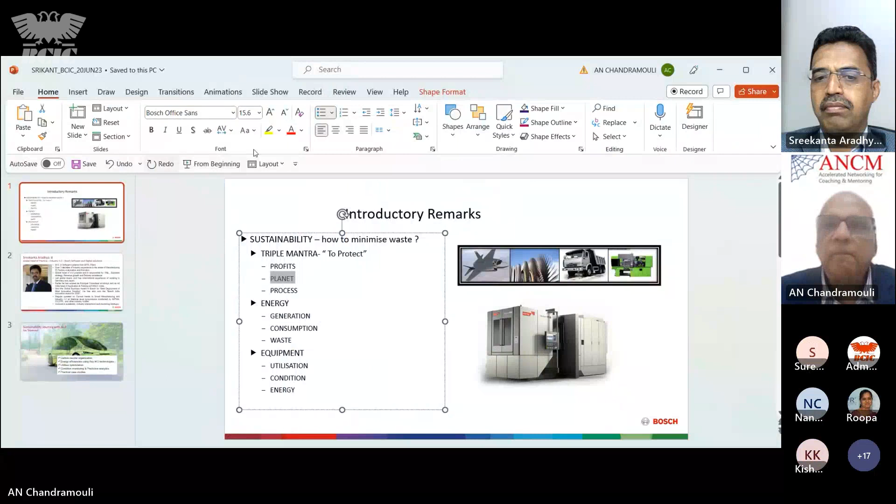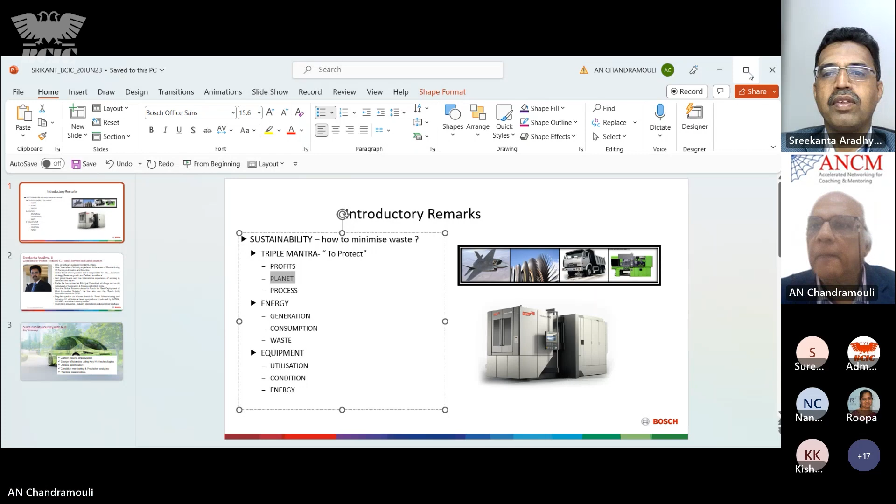Is it visible now, Sreekanta? Not yet. Yeah, visible now, is it not? Yeah, it is visible. Is it coming now? Yeah. So, slideshow. How do I do slideshow? Okay Sreekanta, is everything visible, sir?

Yes. Great. Welcome to all participants, and more are coming in. By the time I finish, I think all 100 participants would have joined. Let us score 100 today. And I want to make a couple of remarks on the session itself.

Sustainability. Many people, including me, would like to raise an eyebrow when we talk about sustainability, which is a very laudable objective that everybody talks about in terms of global warming and stuff like that. The triple mantra is a very famous topic where we talk about protecting the planet, the only planet on which we live, we have to protect it. Profit cannot be the only motive to be protected. You can only protect profit if you can protect the planet. This is the concept of sustainability.

Sustaining is different from sustainability. Many people get mixed up between these two. Sustaining is having longevity, sustenance, or resilience in the market, etc. But sustainability has got to do with the planet. In this, the process of managing the planet and the profits is extremely important.

Sreekanta will talk about many process-related improvements, but how do we leverage the latest Industry 4.0 and digital technologies to improve our process? And what is the focus of the process? In my view, the focus of the process is how to minimize waste. There's no point talking big jargon like AI, AR, IoT and all those things unless we can eliminate and minimize waste in our organizations, be it manufacturing or service, it doesn't matter. All organizations have got humongous waste.

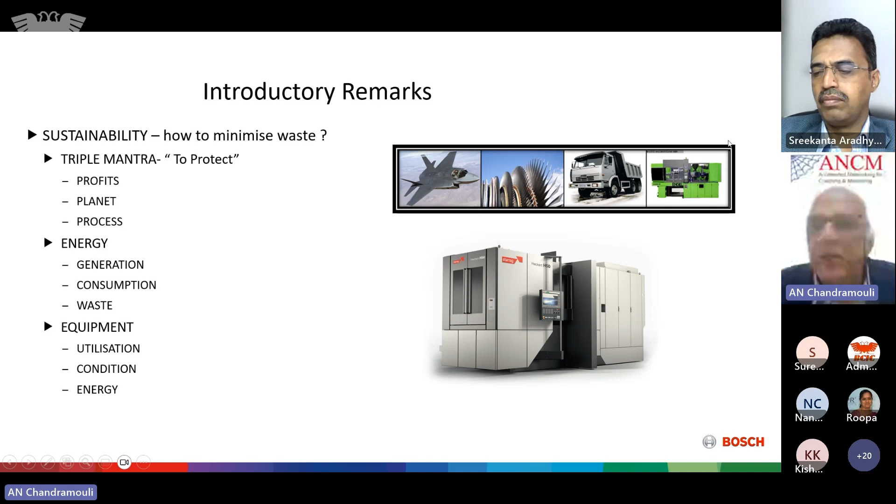I just put some pictures here in terms of the sectors we are talking about and the machine tool, etc., but nothing to do with those brands.

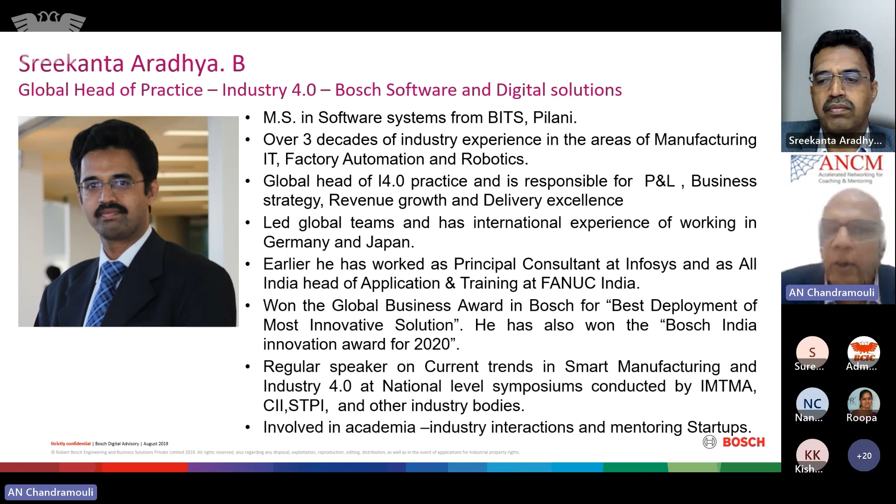Without much ado, these are the takeaways, as you are all aware of, right? Carbon neutral organization, energy efficiencies using key I4.0 technologies, optimizing utilities. Utilities means not only the supply and distribution utilities from the electrical BESCOMs and ESCOMs, but also utilities inside organizations like compressors, generators, etc. Condition monitoring, predictive analytics, practical case studies.

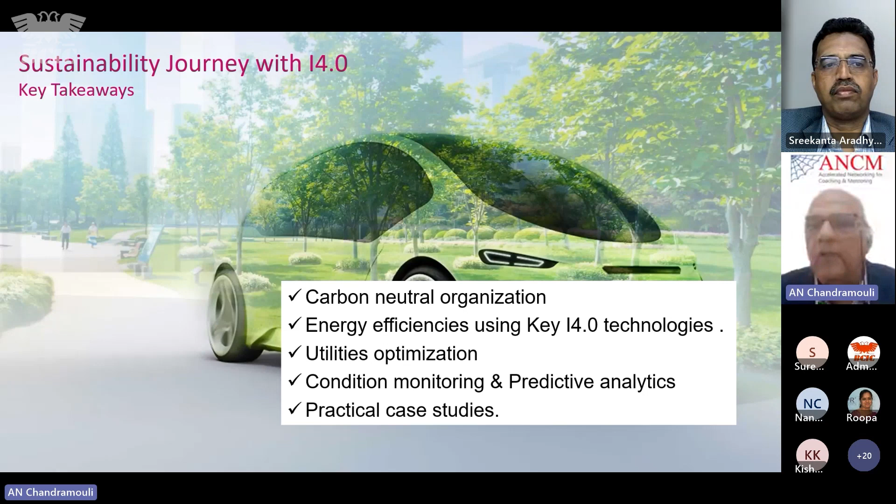Thank you very much. Let me unshare and come back to the main slide. Somehow in MS Teams, when I share my slide, my face disappears. When my face comes up, my slide disappears. Very good, thank you, Mr. Sreekanta. I hope in your case both the face and the slide work. That is Bosch, very good. Okay, over to you.

Thank you, sir. Thanks, Chandramouli sir, for that very nice introduction to the subject. I think you might have covered at least 20% of what I was supposed to speak. Thanks for that, and thanks to the Bangalore Chamber of Industry and Commerce for providing me an opportunity to talk about the sustainability journey with Industry 4.0.

Without much else, I will go through the agenda planned for this session. There will be a few minutes of context setting on why sustainability is really a priority for corporates. Since we are talking of sustainability and I come from Bosch, which is a pioneer in sustainability, I will tell you about our journey and what we have achieved till now.

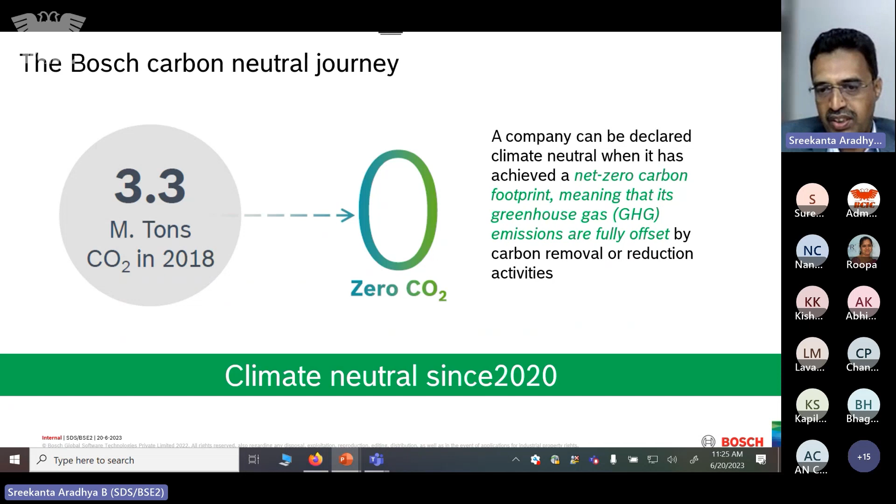Bosch has become carbon neutral from 2020 onwards. We were consuming around 3.3 megatons of carbon dioxide in 2018, but we quickly became zero carbon dioxide, or climate neutral. A company is declared climate neutral when there is a net zero carbon footprint, meaning the greenhouse gas emissions have been completely offset, either by reduction of activities or by means of carbon offset. Bosch achieved this around 2020, not only at the Bosch headquarters in Germany, but all locations worldwide achieved this. This is the first industrial enterprise to become carbon neutral, and much ahead of its target.

And Bosch really invests a lot of money in climate control and climate preservation and such things. So how did Bosch do this? We used four levers for this.

One was, of course, increasing energy efficiency. Second, a lot of energy which was coming through the normal route, we have now shifted to the renewable energy route. The third is, wherever we are unable to go with the renewable energy route, we have also purchased electricity which is more green. And the fourth is compensating carbon emissions through carbon offset.

This carbon offset is something available to corporates, meaning you can fund sustainability projects happening anywhere through a regulated third party. In India, I think IREDA provides carbon offset certificates. So you get a certificate for the investment you have made in a sustainability project, and that gives you an offset, so some amount of what you are consuming gets offset. This carbon offset is one more way, but you cannot offset all your carbon footprint — there is a limit, and you can utilize that limit.

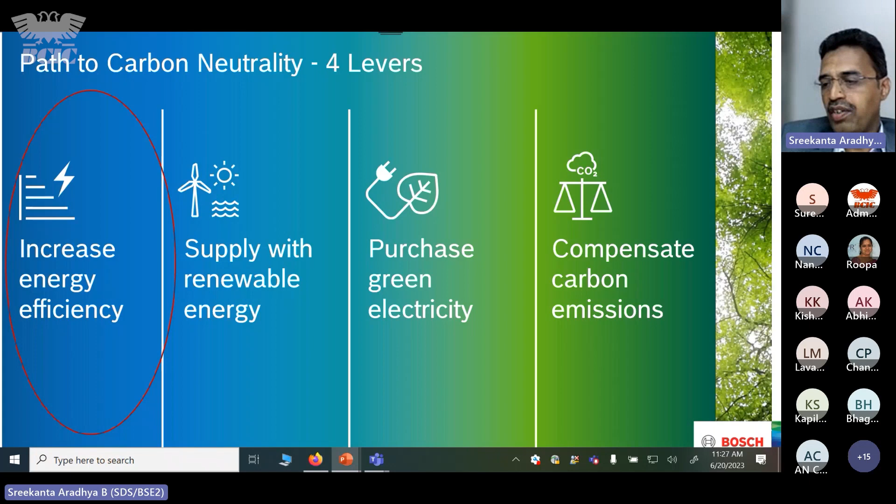So these are the four levers Bosch used to achieve carbon neutrality, out of which one main lever was increasing energy efficiency. We did this with one of our sustainable platforms, which we call DeepSight, which we'll discuss in more detail later. Increasing energy efficiency is one of the key important requirements in most industrial and manufacturing companies today.

Now that was more about Bosch and the world.

Coming to India itself, in the corporate sector, Infosys has been the first company to become carbon neutral. A lot of other companies like Reliance, Adani, and TCS are also declaring net zero targets and the year in which they will achieve it. There's a growing consensus among corporates to go for a lower carbon footprint.

Shifting to the government side, the Indian government is a major signatory to the Paris Agreement, and we have pledged to become net zero in carbon emissions by the year 2070. That's about the complete country.

The current condition is that India is the 3rd biggest emitter of greenhouse gas. That means we contribute in a wrong way very highly, and so all of us should really think about how we become more sustainable, both from the corporate world and as people.

Now, having covered why sustainability is very important, the Bosch story, and the Indian story, we will look at how Industry 4.0 is linking with sustainability.

Many of us already know that Industry 4.0, which is more of a 4th industrial revolution, has been happening over the last 10 years. It is a confluence of digital technologies, automation, communication, and data exchange in manufacturing. There are 9 technologies that really form the bedrock of Industry 4.0, including industrial internet, IoT, AR, VR, AI, ML, and all these things.

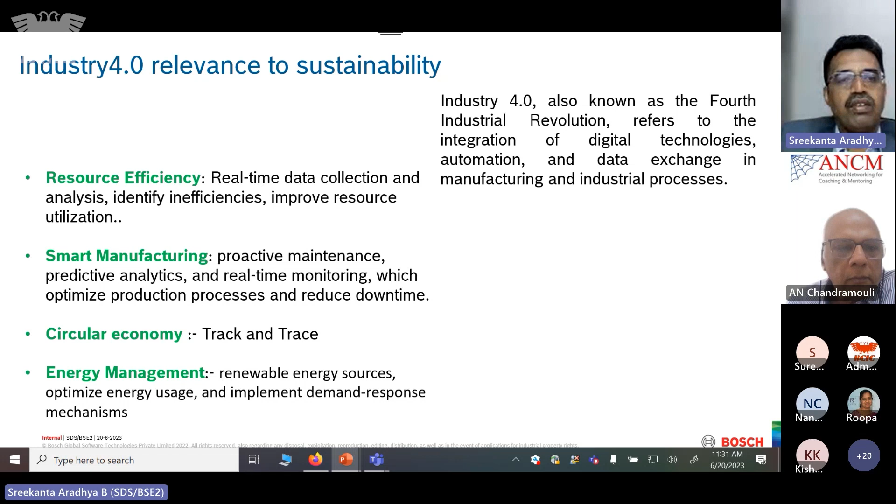So in effect, what you are trying to do is measure your emissions or energy consumption, and then monitor and optimize it. That's how Industry 4.0 tech applied to sustainability can be summed up.

And one important thing here is data, because data is the real fuel. As you start acquiring various kinds of data, you need to be able to store and manage it, and analyze it. So data is going to be a key component of your Industry 4.0 tech in sustainability.

Now let us look at areas in a manufacturing plant or industry where there is a facility for you to digitize.

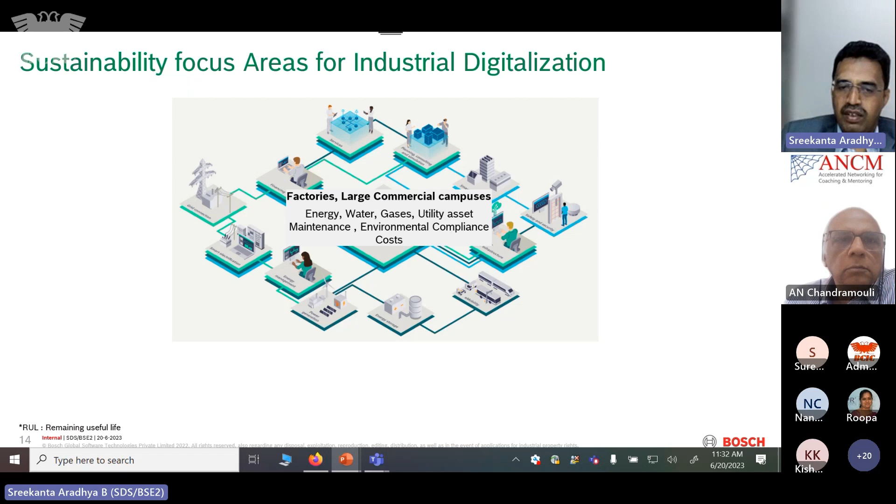One is, of course, in terms of your energy, water, gases, environmental compliance. But I also listed specific focus areas. One is energy management and optimization. There is an ISO standard, ISO 50001, which defines how you manage energy in your organization, and this gives you various ways of managing energy.

This could possibly be how you look at the peak load consumed by your machine or manufacturing line, and how you take care of the peak loads. That means at that time you have peak energy consumption happening, and you also need to draw a lot of energy into your subsystem.

And there is an idle load. That means when a machine is not working, not cutting, or not performing, it is an idle machine. Many times, even when a machine is idling, it starts consuming energy. So how do you really reduce this idle load? How do you identify that a machine is idle, and how do you start reducing it?

As I was mentioning, every asset in your organization - it could be HVAC, compressors, possibly your motors - for all these assets, you can establish specific energy benchmarks and compare them with similar resources, and progressively start reducing their energy consumption.

That's all about energy. That's one very big focus area.

Second is about water management, because water is also one important part of the sustainability journey. How do you source the water? How do you manage the water in your entire facility? How do you really provide water back to the earth? These are all the areas of water management, and you need to sensorize all of them and possibly see how you can optimize them.

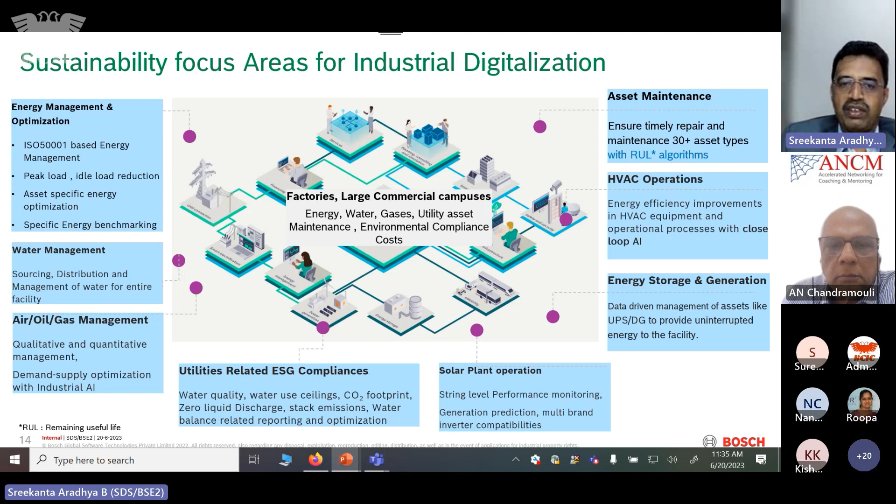So the WAGES circuit, renewable circuit, and your electrical energy circuit - all these circuits need to be managed and optimized, which helps you in your sustainable journey.

Now, those were the different areas, but how do you really look at progressively going higher in your sustainability journey? So we have put together 5 steps for that.

One is, of course, the most basic step - eliminating wastage. We talked about non-production days in your manufacturing plant, idling of your machines, even your power factors. If you refer to your physics classes, power factor is a very important constant which actually alters the amount of energy you have consumed. So power factor can be tuned - how do you tune it? These all come under elimination of wastage.

Then looking at the asset and how do you increase the asset efficiency - that should be your second step. So once you remove your wastage, then look at the asset and how you can make it more efficient. So asset is more of a point intervention - that means an asset can be one machine, one HVAC, one compressor, and such things.

But then the assets together, or maybe your manufacturing line together, also needs to be managed. So your complete process and operation - what you do in the process, like cycle time, your ramping up and down strategies whenever you get a load or more demand, how do you ramp up - each of them have a correlation to the amount of energy you are consuming.

And then you can also think of optimizing your manufacturing or production plan, because there could possibly be specific machine allocation, where a machine consuming less energy can be used more than a machine which consumes more energy. Similarly, optimal changeover - because whenever you do a changeover from one particular part to the next, there is a downtime.

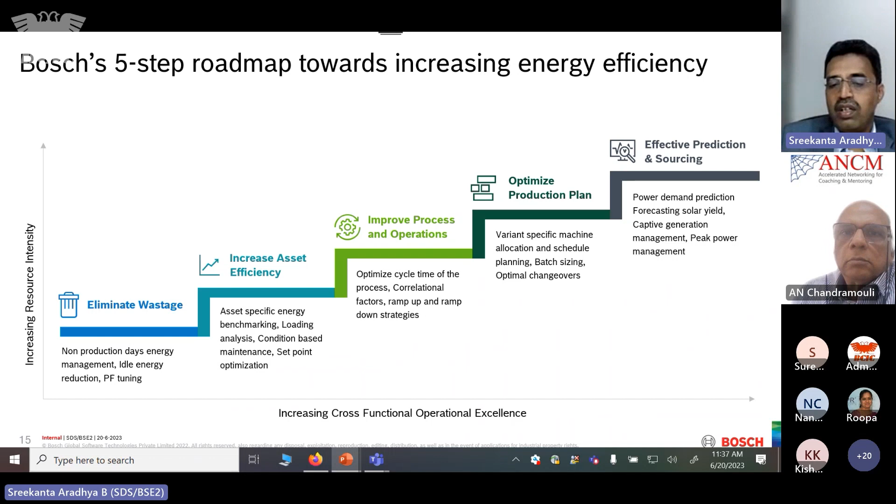Now we have looked at the areas in a manufacturing plant which can really be focused, and what are the steps in which you have to go so that your sustainable journey becomes more smooth and gives you more success. To do all these things, you naturally require a solution.

So now there are a lot of various kinds of solutions, Industry 4.0 solutions available in the ecosystem. Possibly, if you look at the business impact on the y-axis and the complexity of a solution on the x-axis, there are solutions which give data acquisition - that means you basically connect to a particular asset or to a particular utility and start monitoring it, basically acquiring data from the device.

Acquisition of data from an asset is not as simple as it is made out, because each asset comes with its own protocols, especially if you go for legacy assets - many of these would not even be sharing the data. So in order to get how much an asset is actually consuming, or what is the temperature or pressure of something, you need a solution which can give you out-of-box libraries to acquire the data. And once you acquire the data, there are solutions only for data acquisition.

Similarly, there are digital solutions which do offline analytics - that means I observe the historical data of possibly a temperature or a pressure, and I can tell what is the current, or the diagnosis part of it. So these offline improvements also some solutions will offer. Maybe the complexity is slightly higher than just data acquisition.

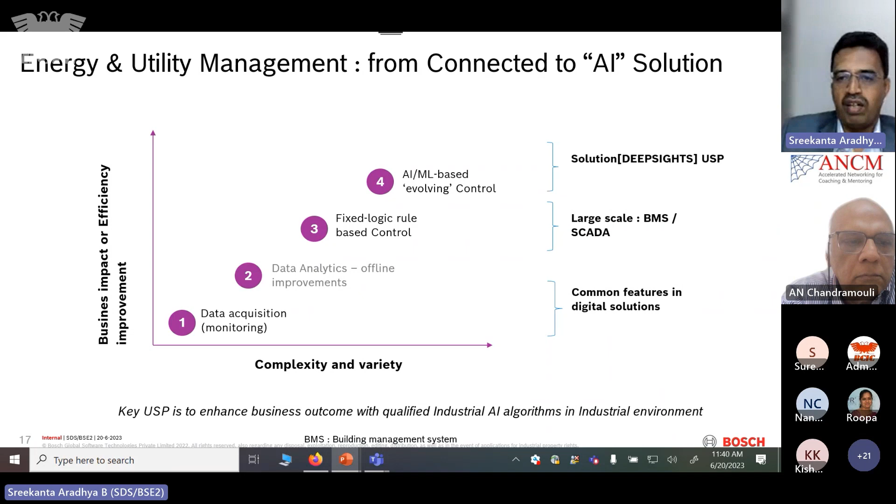We have one such solution which I mentioned as DeepSights. So looking at the same thing, but possibly in a different canvas.

So at the bottom, you see the different circuits in a manufacturing plant, from which you have to acquire data - how much energy is being consumed, or the data could be process related, in terms of temperature, flow, humidity and such things. So as I was mentioning, the WAGES circuit - that is water, air, gas, electrical and solar, or energy and solar - you need to establish for each of them.

For water, you need to have a separate circuit, because the process of connecting to the water circuit is different from the way you connect to an air circuit or industrial gas circuit.

And then the solution also should be able to provide you 4 C's, we call it. One is, of course, the connect layer, where the solution can connect to an industrial sensor, to a standard protocol, to a building management system. And it's always good that this Industry 4.0 technology has an edge capability. Edge means you have a computing system very near to the asset itself, so that whenever the asset thresholds change - for example, the temperature goes up beyond a certain limit - then immediately a corrective action can be taken up near the edge itself, near the asset itself.

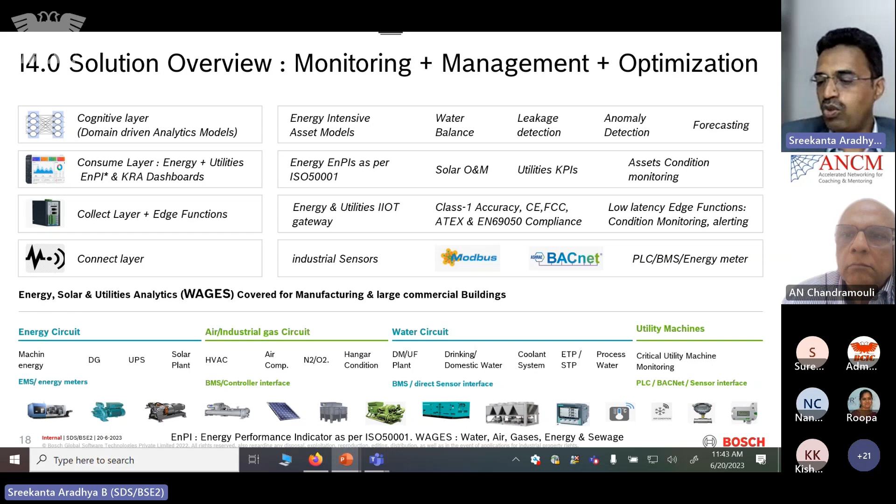So whenever you are looking at managing your energy or managing your utilities, you should look at a solution which can give you all these flexibilities or facilities.

As I was mentioning, a similar kind of solution we have utilized in most of our Bosch India plants, and we are able to see specific alerts, specific reports. We also are able to establish KPIs, for example what is the energy produced per part of production, variant-specific kilowatt hours per part, HVAC optimization, all these things.

Once we are able to do this with an entire full stack solution, the outcomes we have got - we are able to save at least 10 to 12% of energy per annum. We have also saved more than 8,000 plus tons of CO2. And we also get an integrated view of all the sites, meaning whatever solution we are utilizing, you can log into different plants and benchmark the energy performance of one plant against the other.

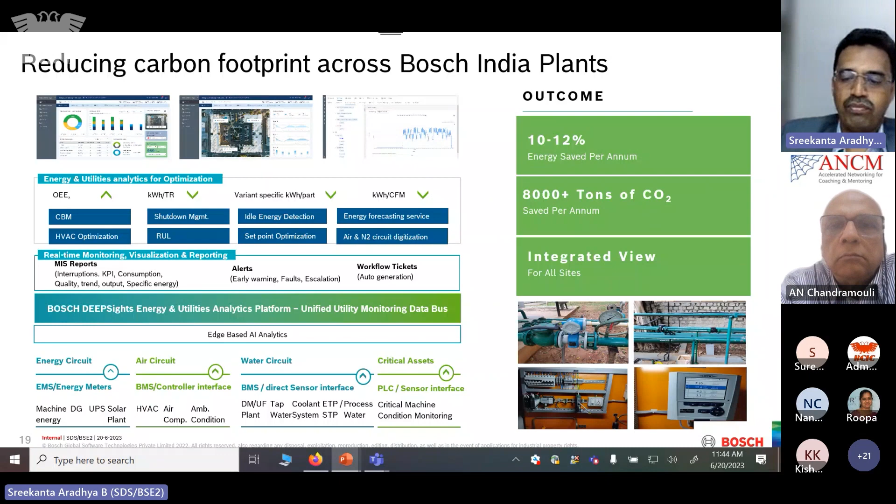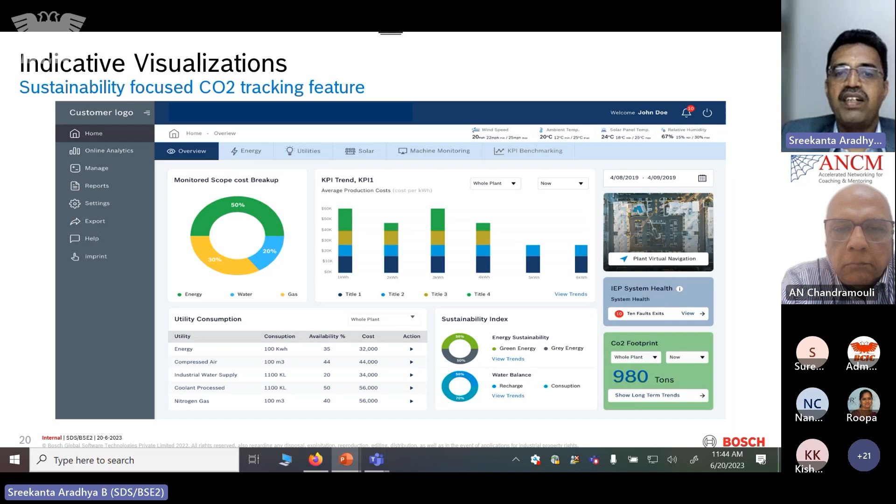So these are the kind of dashboards we look at, which you also can see once you have your own solution. You can look at what is the water balance, how much water is getting recharged, and what is the trend of your energy consumption. You can also look at the demand supply curve.

This demand supply curve, you can also use to predict the demand - how much is going to be my energy consumption demand in the next day or so. And you can also look at where your energy loss is happening, possibly from the supplied energy to what is metered, what is the energy loss you are going through.

So you need to have such dashboards whereby you will be able to monitor your different KPIs and your energy management requirements.

Now let us look at specific case studies, and I'm going to focus on these case studies more from the 5 steps which I talked of - preventing the wastage, improving the asset efficiency, and looking at having a condition monitoring or AI/ML kind of solutions. Possibly some of these case studies will individually relate to them.

The first one I will look at is more from the wastage reduction. One typical case study which we have done in our plants is idle energy detection. There are 2 graphs here - this is the power consumption graph of a particular machine over a particular day. As you can see, there are peaks in the power consumption and there are troughs. We have put a filter on top of it, and the trough part is where the machine is actually idling - meaning the machine is not producing, but still it is consuming a significant amount of power.

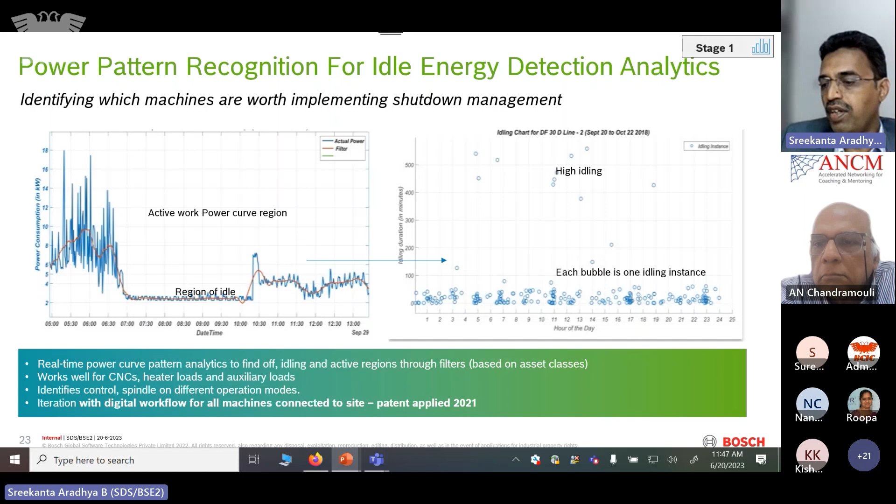In our case, we have taken around 6 to 10 minutes as the idling time threshold for a machine. If it's idling, we shut down that machine, meaning we switch off the power. Or alternatively, if it's idling within that band of time, you can put it on an emergency stop or a condition where the idle energy is reduced from whatever it is currently consuming. This is what we have done in many of our machines, and it works very well for CNC machines, heaters, and auxiliary loads. We have actually filed a patent on this, and achieved very good energy reduction because we are able to identify and reduce the idle energy.

As you can see here, the idle energy for a particular machine which was at 63 kilowatts was reduced to 0.7 kilowatts through auto cutting off.

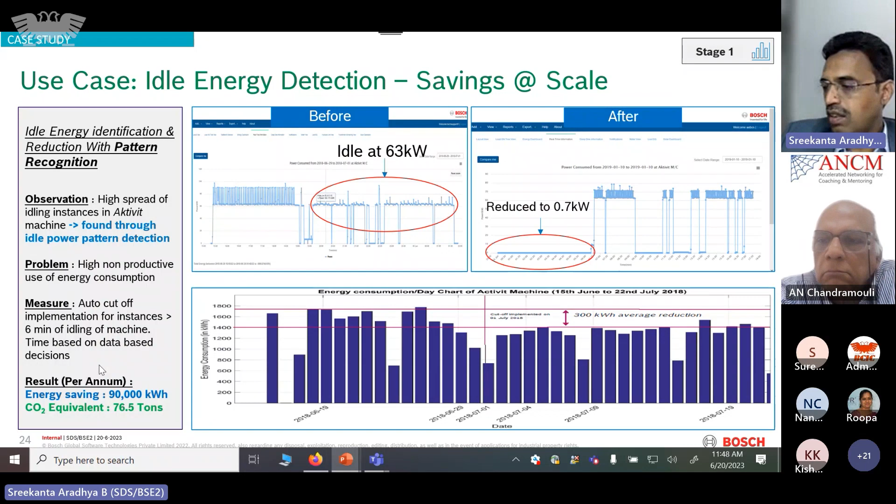The result is this: we were able to save 90,000 kilowatt hours of energy, which is equivalent to 76.5 tons. So savings at this scale can also be obtained.

Next case study will look more at an AI kind of example. This is a clean room environment where we manufacture sensitive parts, where the temperature and humidity of the room need to be controlled, and of course there is an HVAC system which handles this.

But if you see that graph, before we introduced our Industry 4.0 solution, you can see the rise in temperature and humidity. Normally there is a VFD operating, but it's not a controlled VFD. So suddenly, if a furnace operates nearby, there is a rapid rise of temperature in the room, and this is not controlled. So what we did is observe this temperature and humidity pattern and build a machine learning model which is able to identify this peak temperature rise due to external inputs and control the temperature rise by controlling the VFD itself.

This gave us at least around 16% energy reduction, and this particular intervention had a payback within 1 year. Many customers approach us asking for a solution that gives them return on investment, because Indian customers especially are very clear about ROI - paisa kidhar hai, that's their motto. So if you invest in such solutions, your payback will come from the solution itself, and whatever you get after 1 year is actually your profit.

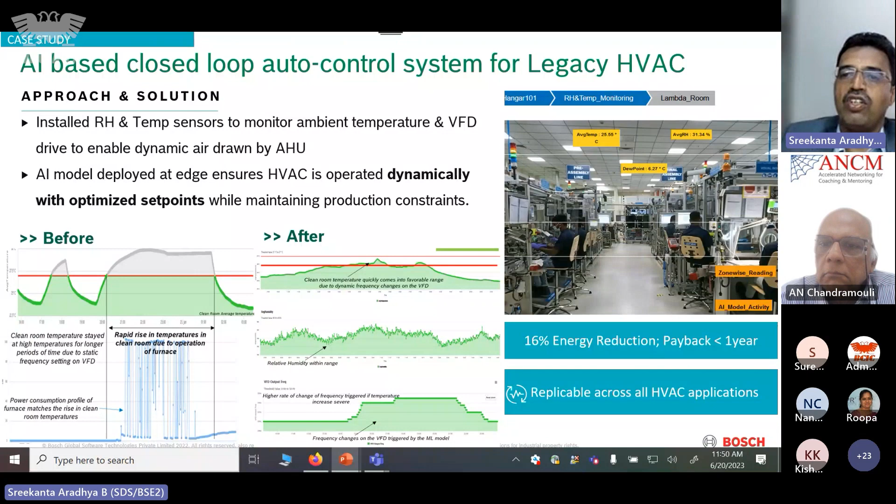So you can look at such intervention solutions in Industry 4.0, using AI, ML or any other approach which can help cut down your energy. But even in this present case, the clean room environment was effectively maintained - meaning the average temperature band and average humidity band were all within limits.

We have put a similar AI model on a cooling tower circuit in our factories, where the cooling fans, pumps, and VFDs all have ML models. We have actually created a repository of asset-specific machine learning models, so that if you bring an asset like an HVAC unit or a compressor of a particular make, we have an asset model ready available, and we can tell you how much this asset can be optimized and the amount of energy savings we can provide.

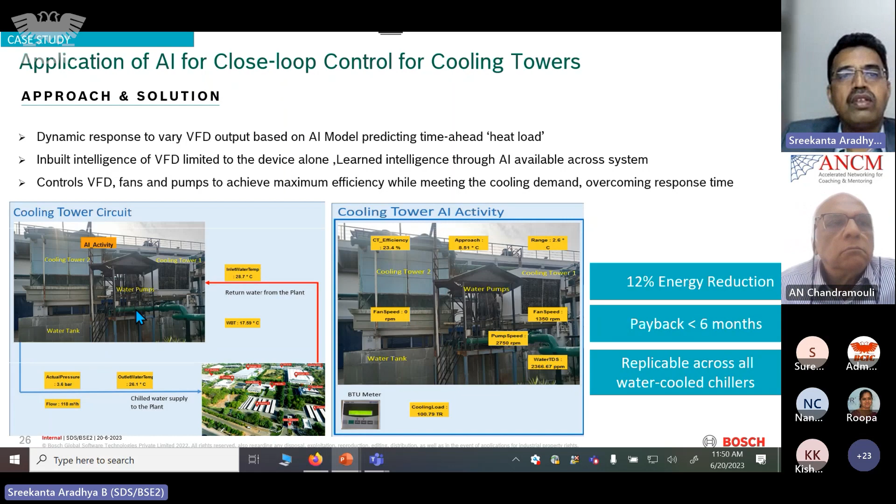Also, since we are looking not only at energy consumption and wastage reduction, but also at resource efficiency - how best you can manage your resources - here is a case, once again from our own Bosch plant, of a grinding machine where the grinding tool, which is quite expensive, costing 1.5 lakh, used to be replenished at a fixed interval of time. That means after a specific number of hours of use, maybe 3 months or 1 month, the grinding wheel would be replaced. But many times, even on a fixed interval, it doesn't mean the grinding wheel has really gotten spoiled - the usage might have been less.

So what we did is create an asset health model - the best model for this particular grinding wheel. We created a health model.

We used vibration data. Whenever the grinding wheel gets more worn out, the vibration frequencies normally increase. So you collect this vibration data, compare it with the asset health model, and then predict the remaining useful life of that grinding wheel.

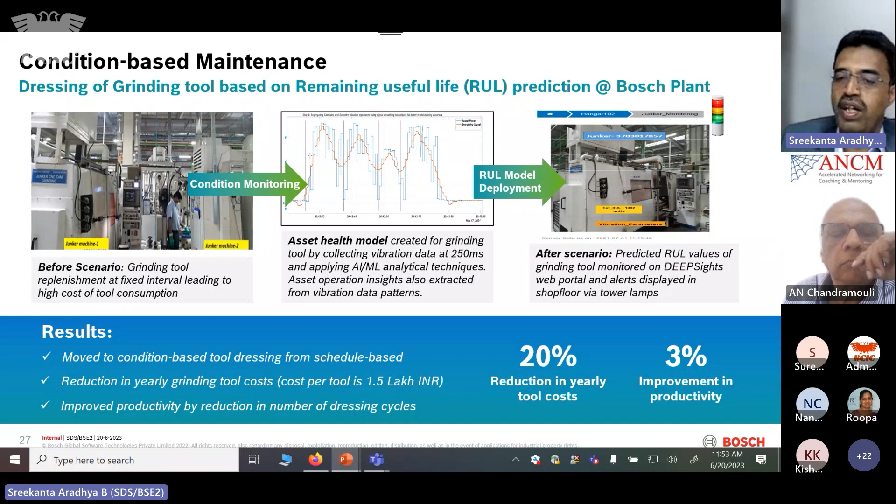Many times the grinding wheel would have been overused, causing it to break, and replacing it after it breaks leads to downtime and production loss. With remaining useful life prediction, you don't need to wait for the grinding wheel's end of life - you can predict when it's going to end, be ready, and replace it. So the resource is effectively utilized, your tool costs come down, and productivity goes up. This is one of the very good case studies for remaining useful life model development using artificial intelligence or ML.

Previous things were more focused on process or manufacturing, or case studies in terms of specific use cases.

We have also been able to make our buildings or campuses smart. We have networked the complete energy, water, solar, and cooling systems in our campus in Adugodi, and made it completely smart. This gives us real-time visibility, great energy savings, and active water balancing - meaning however much water we consume, we try to replenish it so the water table is preserved. So the same Industry 4.0 technologies we've used on the manufacturing setup, we've extended to building management or facility management.

So till now we looked at specific case studies showing sustainability improvements through our solutions, but similar solutions are available and you can use them too. Technology today is quite rampant, and there are a lot of good use cases coming up - these are all tried and tested cases, nothing new.

Now, all the case studies I mentioned were with respect to what we've done internally, but we've delivered similar solutions to companies outside Bosch, to external companies - it could be aluminum companies, textile manufacturers. So this sustainability journey is not specific to any one manufacturer; it's across the domain, and helps in a huge amount of energy and carbon dioxide saving.

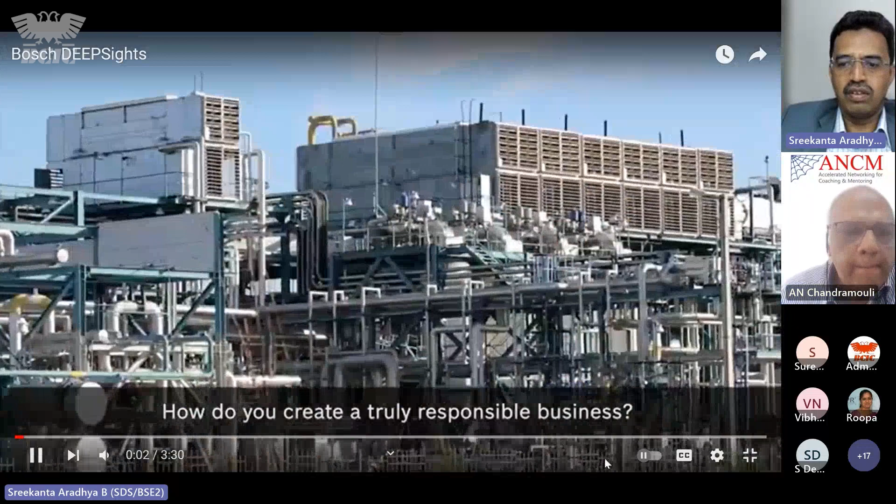I will log out, I will. Just let me know if you are seeing this. Yeah, I can see that, but you have to put sound, sir. Sound is coming? Yeah, slowly coming. Can you increase it? Sound is good.

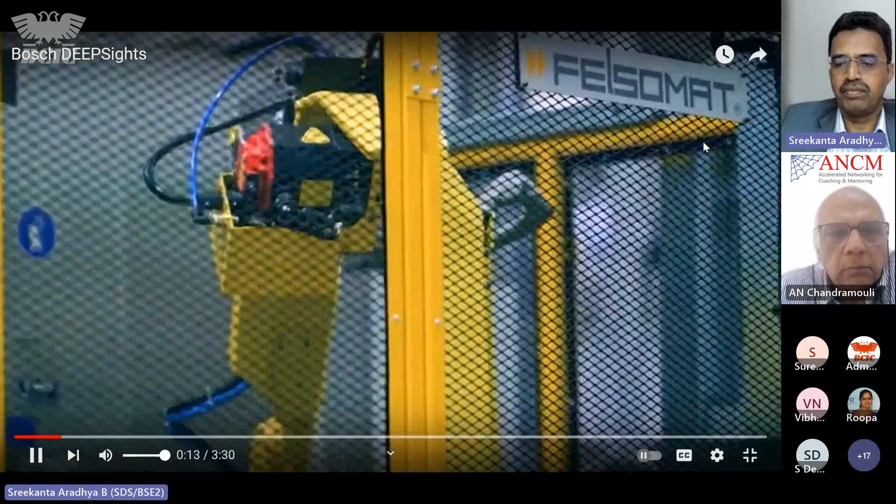At Bosch, we have not just become carbon neutral since 2020, but have also helped organizations across the world achieve their sustainability goals through the power of technology.

The right technology accelerates sustainability successes, and Bosch has enabled businesses to achieve their sustainability goals. And how did we enable this? Meet our fully flexible sustainability platform, Bosch DEEPSights.

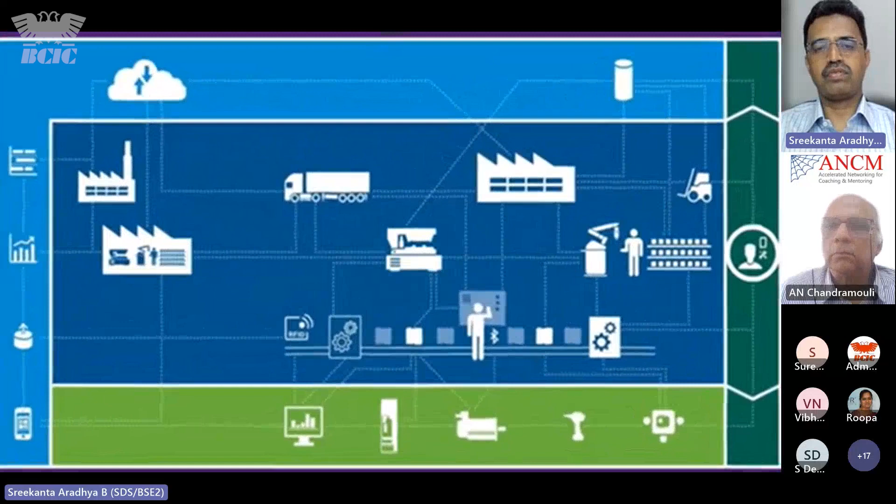The Bosch DEEPSights platform provides a range of digital solutions that enable energy and utilities management, remote condition monitoring, and CO2 emissions tracking.

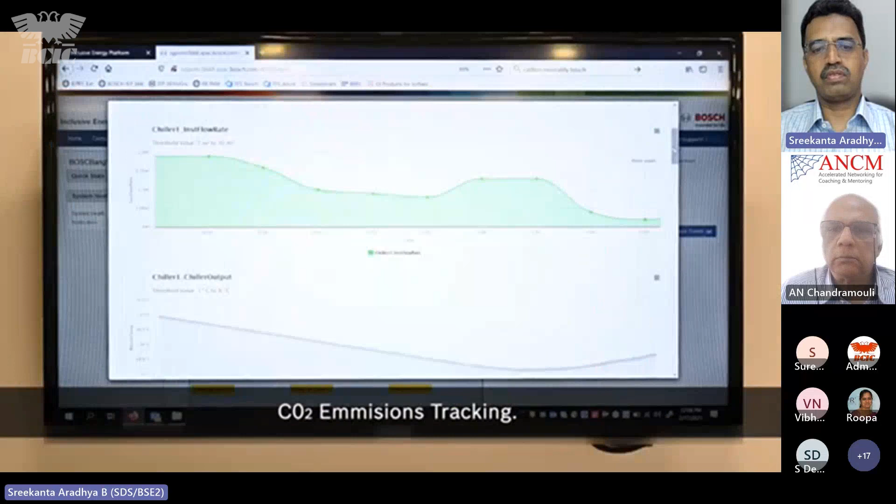The Bosch DEEPSights creates intelligent energy and utilities management in 5 critical steps. The framework is designed to enable advanced analytics deeper and deeper into the total utilities infrastructure at your manufacturing plants. The Bosch DEEPSights wraps up your energy and utilities consumption network into 4 layers.

The cognitive layer uses advanced artificial intelligence and machine learning-based analytics to provide advanced intelligent decision-making tools.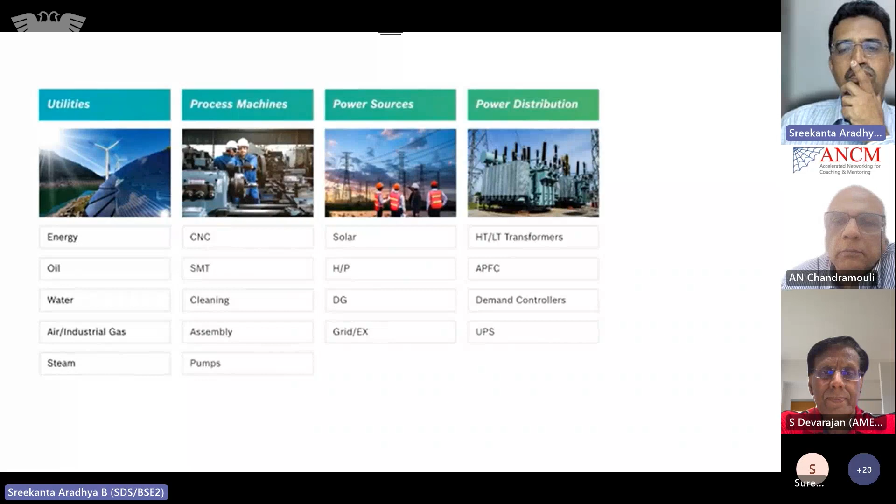The consume layer provides real-time monitoring and reporting of your entire operations with intuitive MIS dashboards. The collect layer employs edge functions such as condition monitoring and alerting with IIoT gateway firmware to combine all the energy and utilities into a single platform.

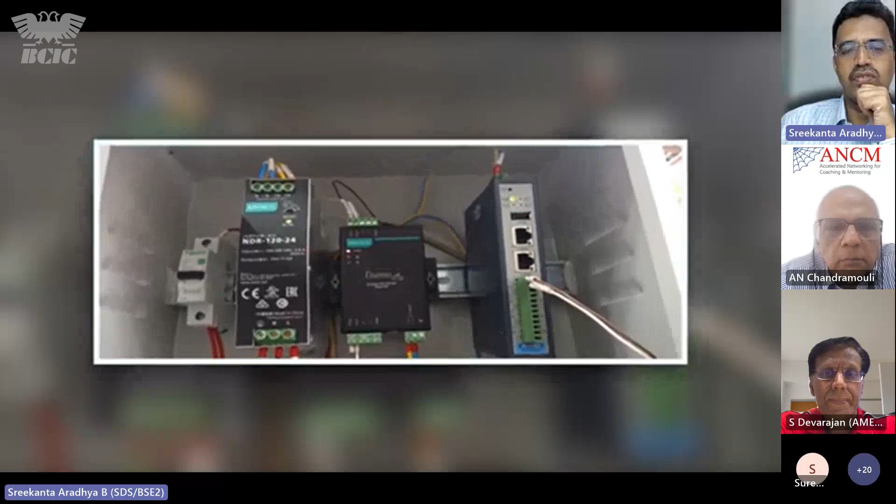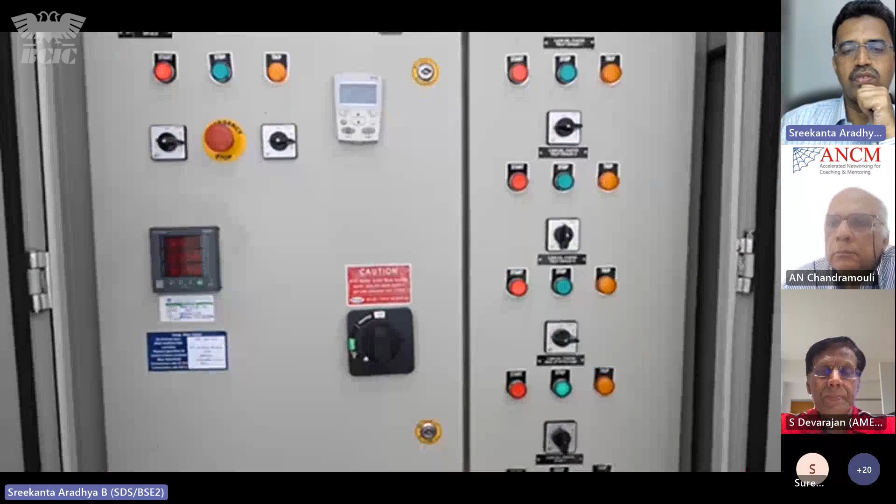The connect layer uses our intelligent SenseNet Plus to connect your plant's assets with 30+ industrial sensors, smart energy meters, and top-of-range data communication protocols.

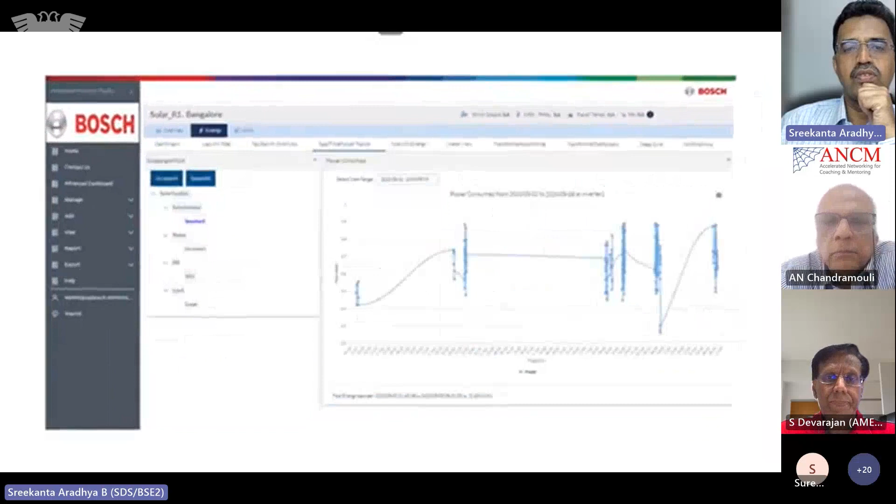The 4 layers combine to form a detailed analytics dashboard that will help monitor, manage and optimize operations with a fully customizable energy and utility analytics suite.

The Bosch Deep Sights is therefore your perfect digital partner to help in digitalizing legacy machines, establish data and KPI transparency, create a library of asset models, and optimize costs and carbon footprint.

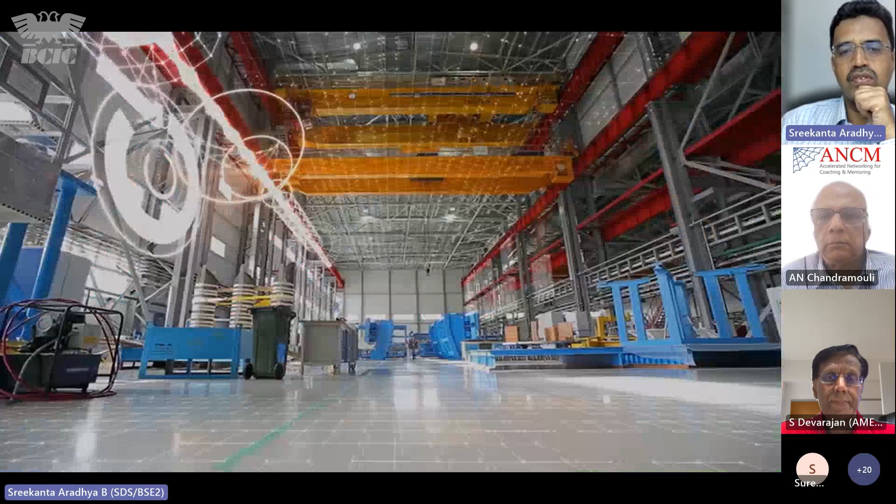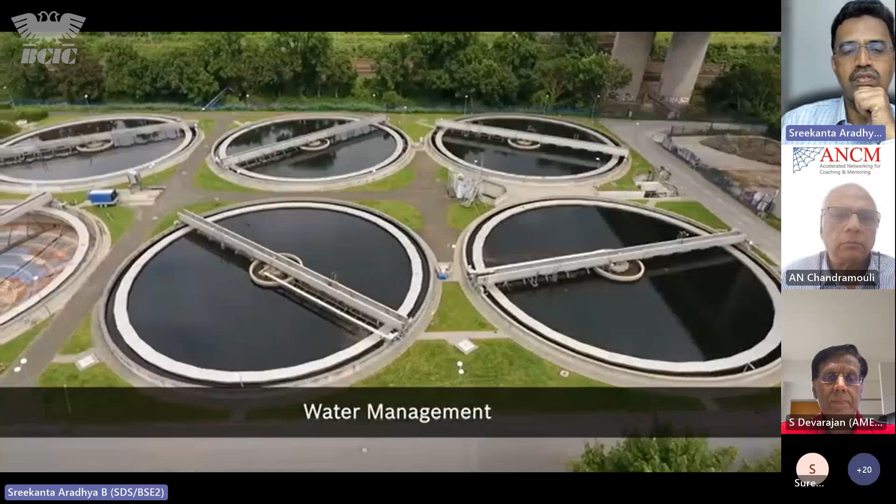The Bosch Deep Sights is a multi-utility management tool covering intelligent multi-utility management, energy management and optimization, water management, air, oil and gas management, ESG compliances for utilities, and solar plant operations.

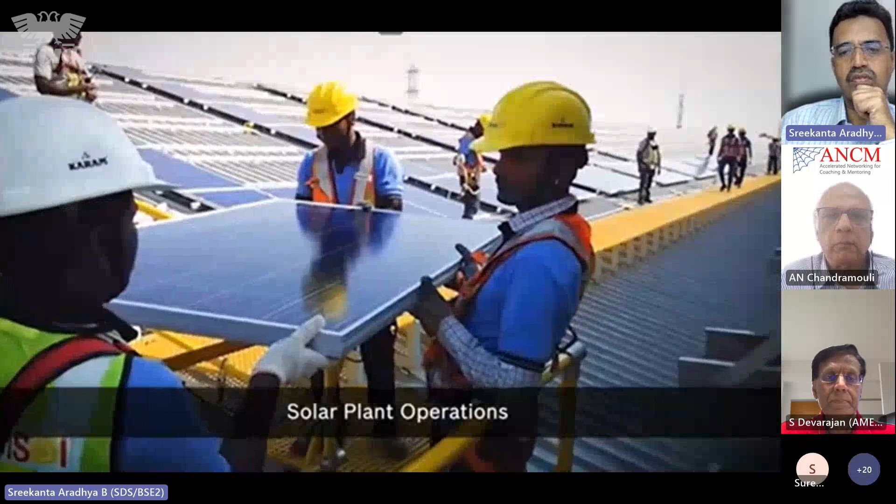And why Bosch? Because we have been one of the principal founders of creating responsible industrial organizations in the world. We believe that sustainability is the only path to profitability.